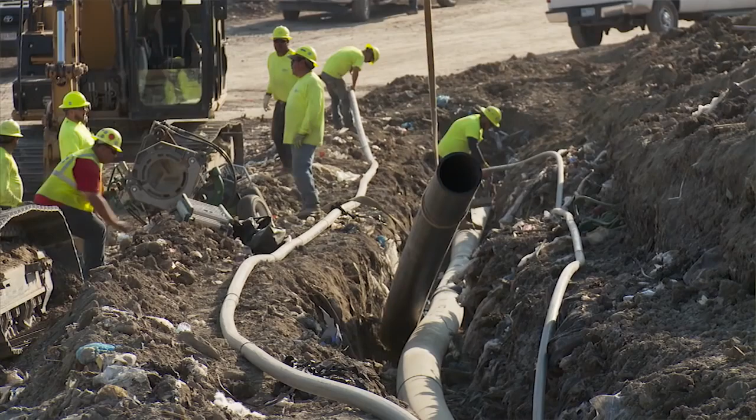Hello, my name is Roy McMasters. I have the privilege of introducing you to the Construction Division of American Environmental Group. We are an industry leader and pride ourselves on our commitment to the safety of our employees and the safety culture we have been able to create.

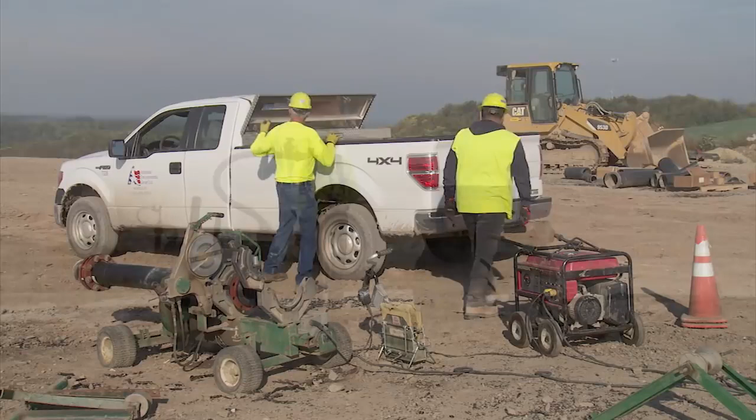Our number one priority has always been to strive for excellence. At AEG, we only do things the right way, which means working as safe as we possibly can every day. We want to make sure you are prepared when you are on the job, so we have created this safety video to give you the basic knowledge and assistance you may need to do your job properly and safely.

At AEG, you are part of a team, so remember your actions affect the entire team. For your safety and your team's safety, it is very important that you always comply with the safety rules. Please pay close attention to this video and make sure safety procedures become part of your everyday work routine. Do not hesitate to ask your supervisor any questions you may have after reviewing this safety video.

AEGL, professional excellence, dedication, and experience.

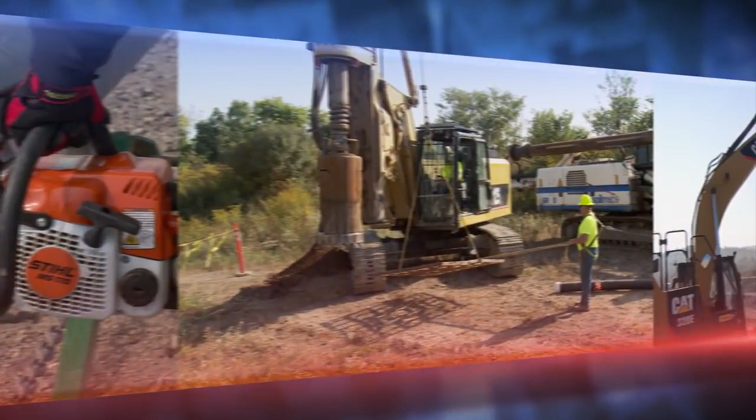Established in Richfield, Ohio in 2002, American Environmental Group Limited, or AEGL, is the leading solid waste construction industry in the United States. With approximately 500 employees and operations throughout the country, AEGL provides specialty environmental, construction, and maintenance services to solid and hazardous waste, environmental, energy, mining, and other industrial clients.

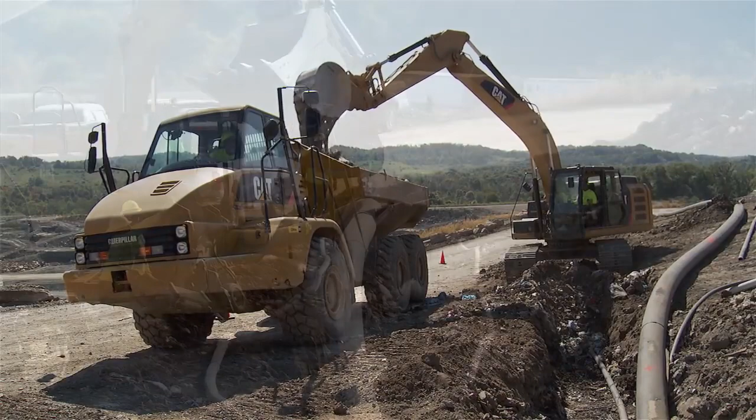We pride ourselves on safety, providing the highest quality service with an emphasis on meeting and exceeding the expectations of our clients. But the success of AEGL is dependent on the strength of its team. Each employee plays a vital role towards the company's success. Through a true open-door policy, employees can freely meet with any member of management to discuss concerns and questions regarding any aspect of a work situation. AEGL encourages strong and open communication within all phases of its operation.

Safety is a core value in all business operations of AEGL. It is our policy to operate worldwide in a safe and responsible manner, a manner which respects the health and safety of our employees, our customers, and the communities where we work. AEGL is required by law to follow many safety practices and regulations, such as those established by the Occupational Safety and Health Administration, commonly known as OSHA, and the Mine Safety and Health Administration, or MSHA.

More importantly, we recognize that our employees are our greatest asset, and we intend to do all that we can to protect our workers. As such, we have established safety rules, procedures, and practices to address recognized hazards and provide the safest work environment possible. However, the only way that any safety plan can be made successful is by adhering to it. Ignoring or deviating from company safety requirements puts everyone at extreme risk and therefore cannot be tolerated.

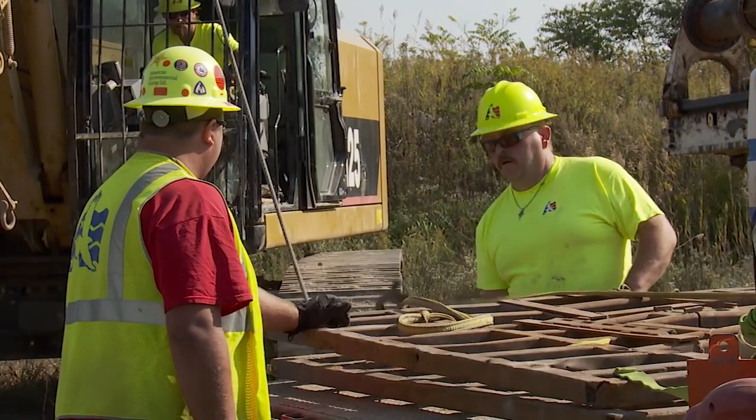supervisor. Every employee has the right and the obligation to personally stop or report any unsafe practice, work condition, or safety violation they observe. An unsafe work condition can also be caused by illness. Be vigilant in your watch for any ill effects experienced by crew members, especially those symptoms caused by heat stress or chemical exposure. Don't be afraid to approach or stop a coworker from doing something unsafe. You may actually be preventing an injury.

If the employee wishes to make a report, they may do so by speaking to their immediate supervisor or to a member of higher management. The employee may also submit his or her concerns in writing, either signed or anonymously.

HASPs are written documents that discuss the anticipated health and safety hazards at the project in which you are working. Their purpose is to define and communicate the company's health and safety plan that is designed to assure a safe working environment for its employees, guests, and the community at large.

The function of this Site-Specific Health and Safety Plan, or HASP, is to identify the health and safety hazards of each phase of site operation, identify the procedures to be implemented to ensure employee protection, identify the PPE requirements for the project, be available to any client or owner, contractor or subcontractor, or representatives who will be involved with site operations. It must also be accessible to employees, OSHA personnel, and federal, state, or local agencies with regulatory authority over the site. Clearly define all safety procedures.

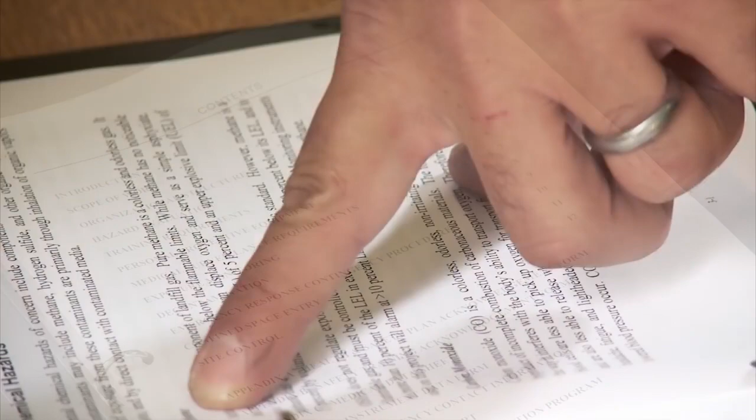In the event of conflicting safety procedures or requirements, AEGL personnel must implement those safety practices which afford the highest level of protection. Describe steps to be taken in the event of a site emergency, such as an injury or fire. While the HASP is prepared to address all of the known hazards at the site, often issues come up that were not anticipated. If you come across a health or safety issue during your work at a site that was not discussed in the HASP, bring it to the attention of your supervisor.

Material Safety Data Sheets, or MSDS, are documents that describe the chemical and physical hazards of chemicals at our projects. Examples of hazardous chemicals are lubricants for equipment, glues or adhesives for assembling pipes, and gasoline for fueling vehicles. MSDS documents are prepared by the chemical manufacturers and are usually shipped to AEGL with the products we buy.

The site supervisor must ensure that an MSDS is available at the project site for each hazardous chemical listed on the project chemical inventory. He must also make certain that the subcontractors are aware of the MSDS location and have access to this information while performing work on AEGL project sites.

While MSDS come in a wide variety of formats and lengths, they all will discuss, at minimum, the following important issues related to safety when using specific chemicals: the chemical name and ingredients of the product; physical and chemical characteristics, such as, is the product lighter or heavier than air, or is it flammable; the routes of entry into the body and how the chemical can affect you.

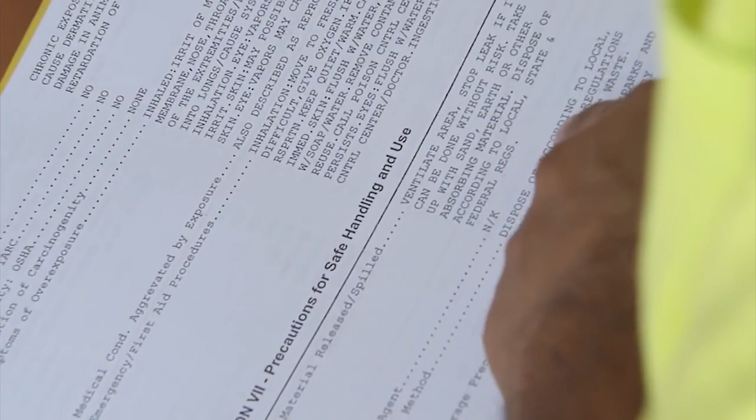It is very important to know the exact location of the MSDS book, so check with your supervisor if you are not sure. Always take the time to read the MSDS for the chemicals you use or are not familiar with. Know the hazards of the chemicals on site and the steps you can take to protect yourself and others before problems occur. The MSDS is a major component of AEGL's Hazard Communication Program.

Other parts include chemical inventory, proper container labeling, maintenance of the MSDS, and employee training. Most of these program subjects will be addressed on a project-specific basis. Site supervisors play a critical role in ensuring the dynamic elements of this program are implemented on each project site. The site supervisor must compile a written list of hazardous chemicals present on the project site to which employees may be exposed. This list must be kept current and in the project MSDS binder.

Site supervisors also are highly involved in container labeling. They must ensure that all chemicals present on a project site are contained in the original container and have readable manufacturer labels and warnings. The labels must be displayed on the container, kept clean and legible, and written in English.

In the future, changes will be occurring within hazard communication. OSHA is in the process of aligning OSHA's Hazard Communication Standard with the Globally Harmonized System of Classification and Labeling of Chemicals, or the GHS. The GHS is a system for standardizing and harmonizing the classification and labeling of chemicals. As of June 1st, 2015, all labels will be required to have pictograms, a signal word, hazard and precautionary statements, the product identifier, and supplier identification.

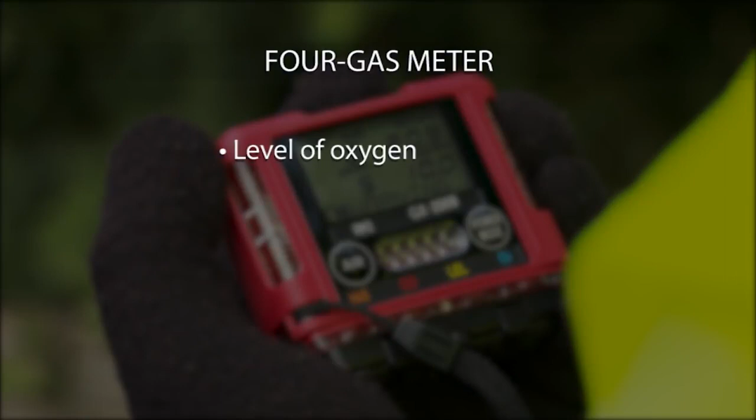Air monitoring instruments are also used at our projects as another means of protecting our workers. While it is not common, there is the potential for airborne chemicals or similar hazards to exist at some of our project sites, depending upon the tasks being performed and the specific area. The most common air monitor we use is a 4-gas meter. This instrument measures 4 different potential hazards in the air: the level of oxygen, the amount of flammables, the level of carbon monoxide, and the level of hydrogen sulfide.

Once the monitor is calibrated, it will alarm if any one of these hazards is present at an unacceptable level, and therefore warns you of the hazard before you work in the area. Air monitoring instruments are very important for your safety when used at our project sites. Be sure that you understand completely how the air monitor works and always follow the recommendations made from the monitoring results. It could very well save your life.

That means evacuate. For O2 or oxygen, the action level is required for a reading less than 19.5%. For the amount of gas or vapor in the air capable of producing a flash fire in the presence of an ignition source, better known as LEL, a percentage greater than 10% demands protective measures. For CO, or carbon monoxide, the action level is required for a percentage greater than 35 parts per million, or ppm. And for H2S, or hydrogen sulfide, a reading greater than 10 parts per million requires that action be taken. If you are unsure on how to operate or read the 4-gas meter, be sure to talk with your supervisor.

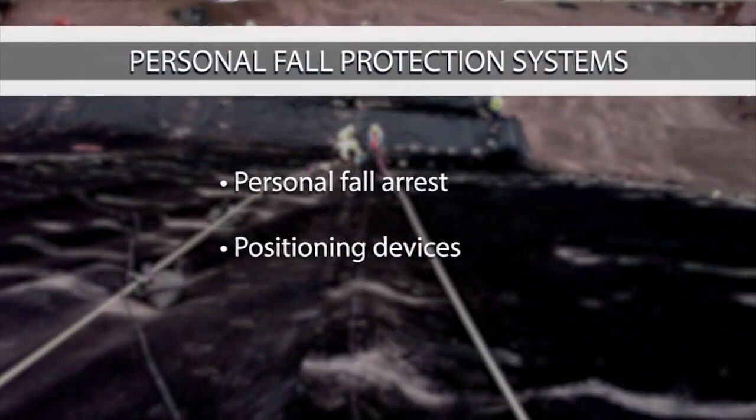Any employee whose work has them outside an area that is not protected by permanent or temporary guardrails or on any other surface, such as structural steel, steps, or landings, where they are subject to a fall greater than 6 feet, must be protected by a personal fall protection system. The 3 types of personal fall protection systems are personal fall arrest, positioning devices, and personal restraint systems. At times, AEGL performs work from elevated platforms where fall hazards exist. This work typically requires a personal fall arrest system for fall protection.

A personal fall arrest system is used to stop an employee's fall from an elevated working level. The system consists of an anchorage, connectors, full body harness, and a lanyard with a deceleration device. Self-retracting lifelines or a vertical lifeline with a rope grab can be used in lieu of the 6-foot lanyard with a deceleration device. Anchor points used in a personal fall arrest system should be secured at or above the level of the back D-ring on the harness. This action will ensure that the free fall distance is limited. The anchor point must be a structural member capable of supporting a minimum weight of 5,000 pounds per employee. The supervisor must ensure that all personnel using a personal fall arrest system are properly trained.

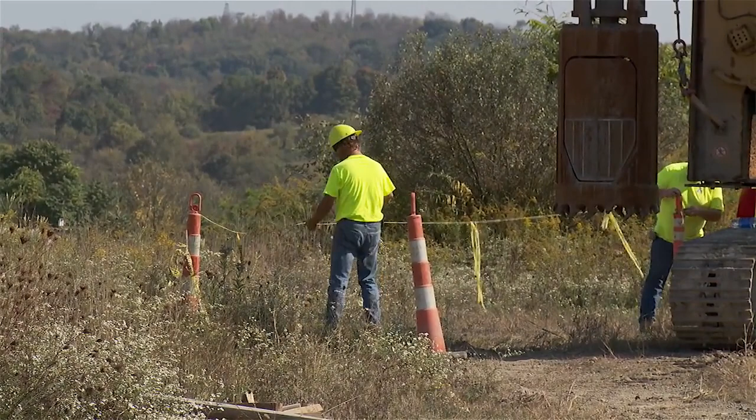For all AEGL drilling operations, there are special fall protection guidelines that have been set in place. To begin, these requirements specify that a 20 to 25 foot barrier must be set up around the borehole before any drilling starts. This barrier can be made up of caution tape or fencing when available. Before any drilling activity begins, you are required to be in a fall protection harness. And this harness must have the safety line connected to an anchor before you are allowed to cross the barrier. In addition, the safety line must be set to allow you no closer than within 2 feet of the borehole. If you are new to drilling operations or have any questions, your supervisor will walk you through the procedure when you are on site.

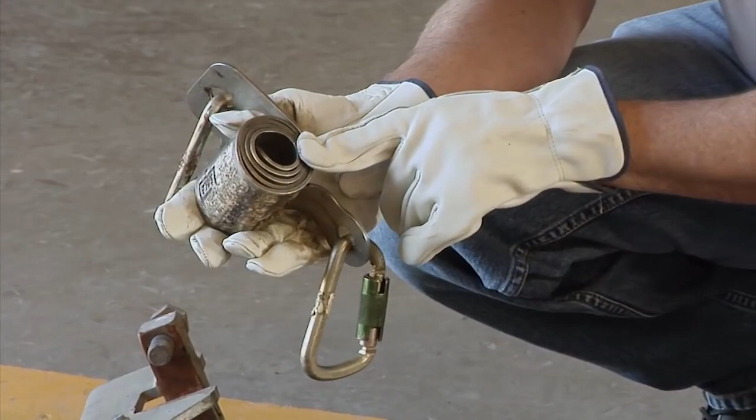It is essential to the safety of everyone that every piece of fall protection equipment be inspected and maintained on a regular basis. Each personal fall protection system's component must be inspected prior to use. Check for wear, tears, mold, mildew, or distortion. Ensure that no straps are cut, torn, or scraped. Check for worn stitching. Inspect hardware for cracks, sharp edges, or burrs. Ensure that snap hooks close and lock tightly. Check for distorted hooks or faulty hook springs, and that all buckles work properly.

Defective equipment must be identified, tagged out, and replaced. Equipment that has been subject to impact loading must be disposed of and not used again. All employees who might be exposed to fall hazards must be trained. The training must enable each employee to recognize the hazards of falling and the practices to be used to minimize these hazards.

There are many things you can do on your own to make your workday safer. By dressing and behaving in a safe, responsible manner on a daily basis, safety will become a habit. While using proper PPE can greatly reduce your chances of being injured, your general dress plays a big part as well. Never dress in worn, torn, or compromised clothing. Make sure that your clothes are of a comfortable fit, not too loose or too tight.

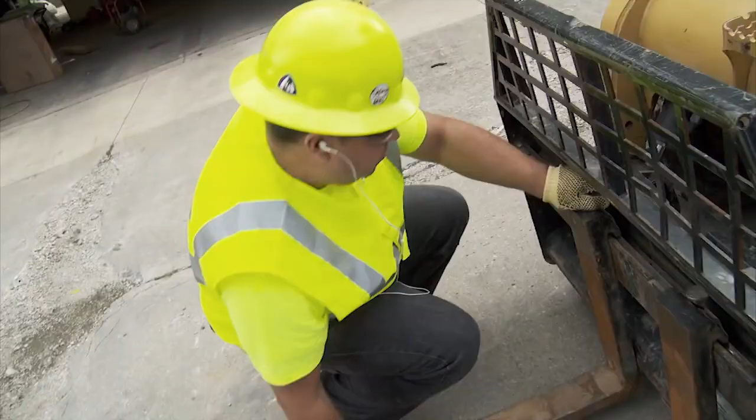Shirts must have sleeves that extend at least 4 inches down the arm. Keep pockets fastened when using equipment where debris or sparks may come in contact. Never wear any type of jewelry while working. Your conduct and behavior are also vital to the crew's safety. Never engage in activity that can cause unnecessary distractions to others. Horseplay of any kind will not be tolerated and is grounds for dismissal.

Personal behaviors and activities must also be kept in check as well. Using headphones to listen to music or broadcasts at the worksite is not allowed. The use of personal cell phones while working is also prohibited. Again, making good safety practices part of your everyday routine will get you in the habit of being safe, and it gets others thinking about their safety preparation as well.

A site-specific orientation is an OSHA requirement and must be conducted by the site superintendent prior to your initial entering of the job site. The site safety orientation must also be documented and signed by all employees attending. In most cases, the client, owner, or contractor will require all AEGL employees working on site to attend a separate site safety orientation. The briefing is usually conducted by the site safety officer.

During the initial AEGL pre-job site-specific training session, employees will be instructed on the following topics: content and implementation of the HASP, site hazards and controls, intended use of the personal protective equipment, and emergency information, including local emergency response team phone numbers, route to the nearest hospital, evacuation, and emergency response procedures. A dry run to the hospital would be good practice in case of a medical emergency.

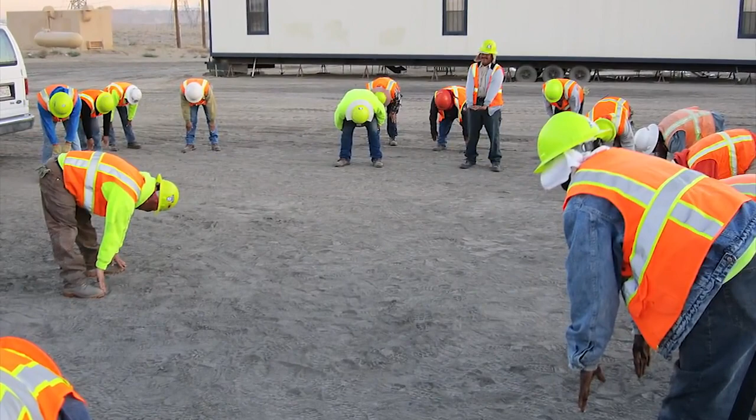Toolbox meetings are used most successfully to inform employees of worksite hazards, assist with safe procedure reviews, and help develop employee awareness. Hazard awareness is a major factor in injury prevention. Often, exercise with stretching is conducted to get muscles and mind warmed up for the work ahead. The following are the primary steps of the JSA safety meetings.

On the front page, or Step 1, your foreman or supervisor will identify all the items that pertain to your work activities that day. These items will be reviewed with the crew. On the back page, or Step 2, all the work activities planned for that day will be listed under Sequence of Job Steps. These are short descriptions of what types of work you will be performing. Examples would be fusing 18-inch pipe, trenching, and placing HDPE pipe.

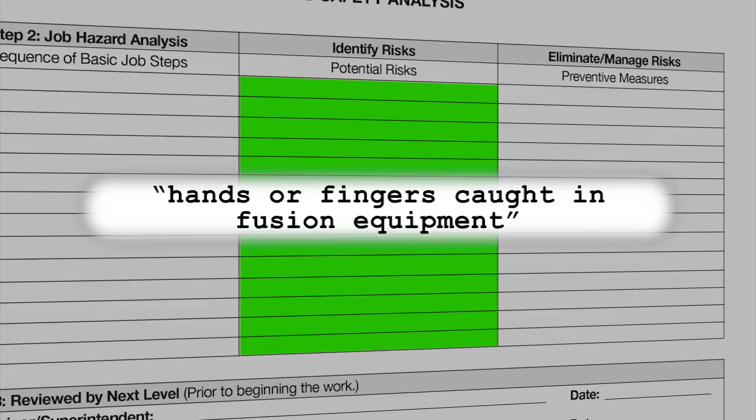Next, the amount of risk involved is identified in each task that is listed in the Potential Risk section. Examples of risk include, but are not limited to, tripping over extension cords, or hands or fingers caught in the fusion equipment. For trenching and placing HDPE pipe, risk includes high H2S, carbon monoxide or methane, trench collapse, and falls into trench. The last step is reviewing and enacting preventive measures to eliminate the risk of injury or reduce it.

For example, preventive measures for tripping over extension cords include: keep extension cords out from around your feet. For hands or fingers getting caught in fusing equipment, the preventive measures would be: wear work gloves. Do not put your hands in pinch points on the equipment. Communicate clearly. Pay attention and ensure pipe is secured and will not roll.

Examples of preventive measures for high H2S, CO, or methane would include: ensure gas meters are calibrated and working correctly. Gas meter required when entering the trench. And if gas meter alarms, leave the trench. For trench collapse and falling into trench, the measures would include: ensure that ladders are placed within 25 feet of all personnel in the trench. Ensure proper benching and sloping. Ensure that spoil piles are 2 feet from the edge of the trench, and place barricade around trench.

Once all the hazards have been identified and preventive measures have been set, the final step is to follow the safety procedures talked about and then sign the form. Take these meetings seriously by listening, asking questions, contributing your know-how for the less experienced coworkers, and following the advice discussed in the meeting.

Many physical hazards can be present during the use of hand and power tools. The greatest amount of injuries associated with hand tools arise from improper maintenance, misuse, and lack of proper PPE. The 3 essential elements of hand tool safety are tool selection, safe work practices, and maintenance. The following safe work practices must be used when using hand and power tools.

Retractable razor knife. Use proper PPE, such as Kevlar gloves and eye protection at all times when using a retractable razor knife. Always use the proper cutting technique, which is to be cutting away from your body parts whenever possible. Be aware of your surroundings. Don't cut over or around a finished liner, as you may damage the liner. Never carry your retractable knife in your pocket. Use a pouch or case to prevent punctures to your body parts.

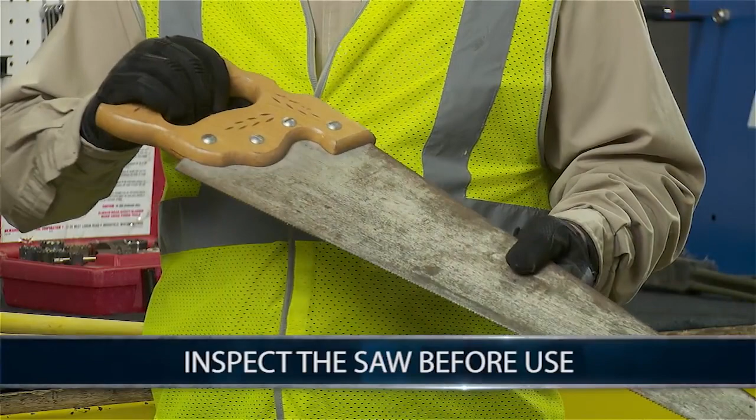The following checklist should be followed for safe use of hand saws. Inspect the saw before use and ensure that the handle and blade are undamaged. Always wear gloves to grip the saw better and protect your hands. Safety glasses must always be worn to protect your eyes, and only use the saw as directed.

All power or hand tools must be inspected before every use. Look over the plug and cord and check to see that the plug and prongs are intact and that the cord is not damaged. Make sure that your powered hand tool is plugged into a GFCI to protect you from electrical shock. As always, wear your eye and hand protection.

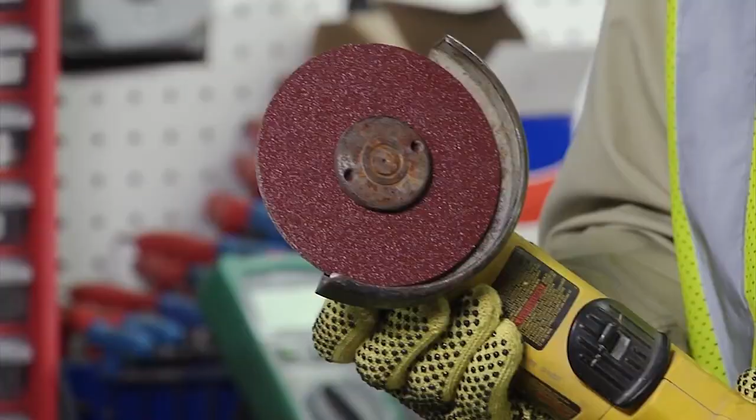Handheld grinders. Always use proper eye protection, such as safety glasses and a face shield. Make sure that the clothes you are wearing fit properly and are not too loose. Excessively loose clothing could get caught in the rotating disc of the grinder. Never wear jewelry of any kind. Check the power cord and plug for damage. Make sure that the grinding disc is in proper condition, mounted properly, and tightened down.

Always use the grinder with its guard on. Never remove or alter the guard in any way. Always use hearing protection. To prevent accidental startup, employees should be continually aware of not holding the start button while carrying a tool that is plugged in. Establish a buffer zone from coworkers.

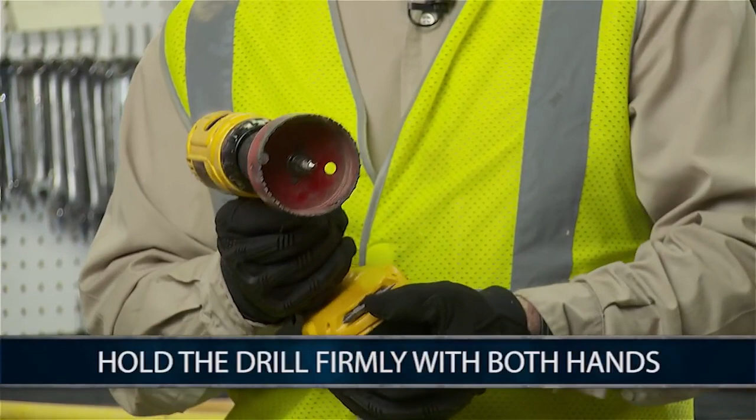When operating the drill, hold it firmly with both hands to prevent the drill from spinning or rotating. Always be certain to inspect the drill bits and attachments as well for excessive wear and tear. Bits that are worn or damaged not only may be hazardous, but they will make your job much more difficult.

When drilling out the hole for a branch saddle, special precautions must be taken to prevent you from being struck by the drill. When drilling, there is always the risk of the drill bit becoming pinched or wedged in the material. If you are not prepared for this hazard, the drill could spin and end up striking you. Follow these precautions to avoid this hazard.

Always use 2 hands to hold the drill. Never have your face or any body part close enough to the drill that it could strike you. Be prepared for the possibility of the drill to catch and spin at all times. And, as with all your tools, when you're done with it, be sure to put it away in its proper location.

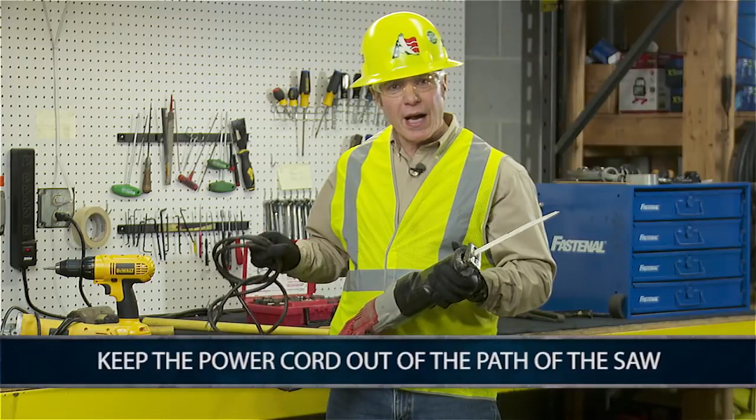For many project situations, a Sawzall is the right tool for the job. The following are safety guidelines that must be recognized when using this particular saw. Wear eye protection at all times when using the reciprocating saw. Keep the electrical cord out of the way of the cut being made. Hold the saw firmly with both hands when making cuts.

The saw will vibrate a lot during operation and must be held tightly to keep the cut on line and to avoid being dropped during operation. Never operate when in close proximity to other workers. The blade on this saw is unguarded, and the vibration movement of the saw makes it especially hazardous to bystanders.

Always be certain that the material being cut with the reciprocating saw is properly secured. And do not bind or pinch the blade when making cuts with the reciprocating saw. Binding the blade may cause the blade to break or possibly jerk the saw from the user's hands. Be sure to use the correct type of blade for the material you're cutting. If you're unsure which type of blade to use, ask your supervisor.

Remember, the Sawzall is a very useful and effective tool, but the unprotected blade also makes it very dangerous. Always keep safety and situational awareness in mind at all times when using the Sawzall.

Chainsaws are used almost daily on AEG construction job sites. They are extremely useful, but can also be very dangerous if not used properly. Remember, the chainsaw will cut through your leg just as fast as it will cut through HDPE pipe. To prevent you from being injured, the following safe work practices need to be followed each and every time that you use a chainsaw. If you have never operated a chainsaw, ask your foreman or supervisor to show you how to operate a chainsaw correctly.

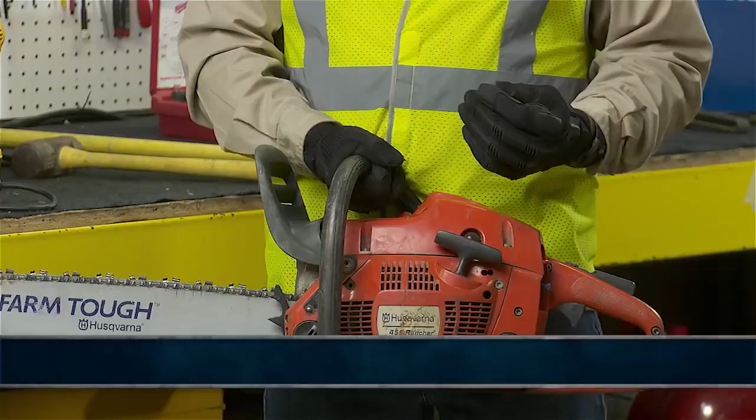Proper PPE is always required. This includes safety glasses or a full face shield and hand protection such as Kevlar gloves. Remember to always inspect the chainsaw before each use. Ensure that the saw is fueled and that the blade is sharp and set at the correct tightness. To properly tighten a chainsaw blade, speak to your foreman or supervisor, even if you think that you know how. This is because different manufacturers require different tightening techniques.

Now let's take a look at how to properly start a chainsaw. Knowing how to start a chainsaw properly is extremely important to your safety. In fact, most accidents involving chainsaws are due to poor technique at startup. Remember, you must always take your time when working with a chainsaw, making certain that no harm will come to you or your coworkers. While we all want to get the job at hand done, never cut corners when it comes to safety. Let's begin by inspecting the chainsaw blade.

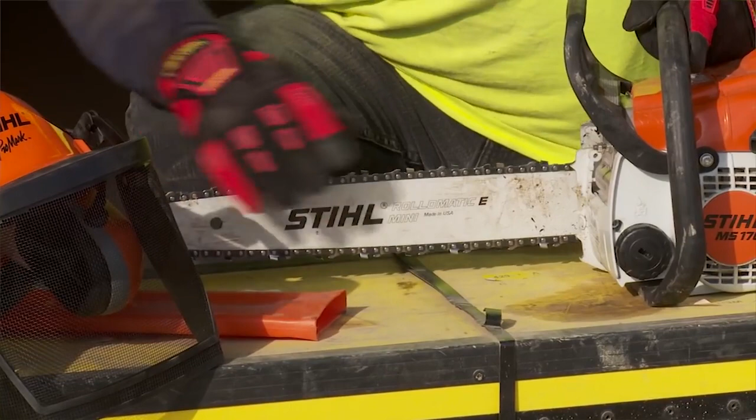To identify if your chainsaw blade needs tightening, look for a slack in the chain that hangs below the handlebar. Once properly tightened, a chainsaw blade should allow minimal slack and snap back into place on the bar when you pull it down. Remember, we do not normally use bar oil in our chainsaws. This is because the oil would interfere with the welding of the HDPE pipe.

Before you start the chainsaw, always clear your immediate work area. Then, make sure that the fuel and oil caps are tight. Wipe away any fuel or oil that may have been spilled when added. This is also a good time to perform a visual inspection to check to see if any parts are broken or missing. Also, you should always look to start a chainsaw at a minimum distance of 10 feet away from any fuel source or container.

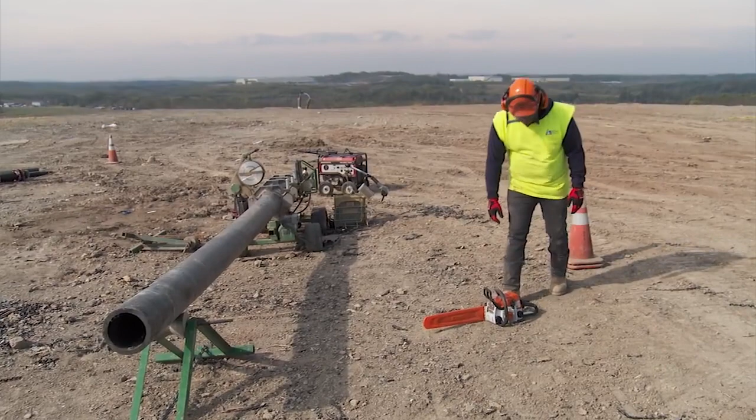As mentioned earlier, a chainsaw is never to be operated without wearing the proper PPE, such as eye and hand protection. To start a chainsaw, begin by placing the saw on the ground. Make sure the chainsaw is on level ground and check that there are no objects or obstructions nearby that could come in contact with the saw. Then, slip the toe end of your right foot under the rear handle.

Next, take your left hand and wrap your hand around the top handle and grasp it firmly, making sure that your elbow is in a locked position. With your right hand, grip the starter handle and pull on the rope. If the saw doesn't start within 5 tries, alert your supervisor for help.

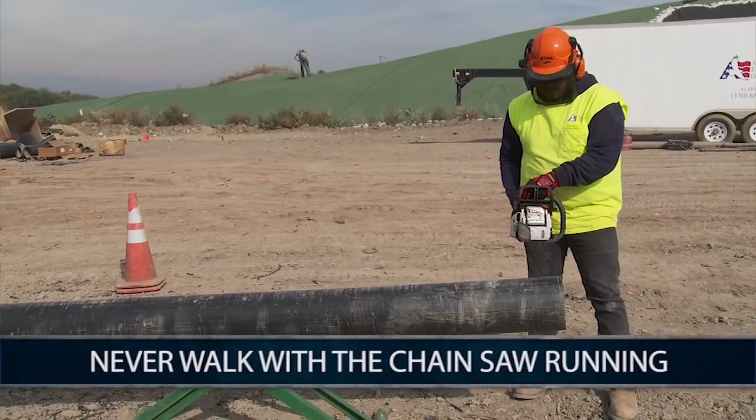After starting the chainsaw, release the chain brake. Maintain a firm grip on the machine at all times. Keep the chainsaw in front of you and never walk with the chainsaw running. If you need to adjust what you're cutting, always apply the chain brake and set the chainsaw down first.

Always make sure that you follow these steps entirely and completely when starting a chainsaw. The few minutes that it takes to operate a chainsaw or any piece of equipment properly is nothing compared to the time it takes to recover from an injury. Remember, when working with any power tool, being smart means being safe.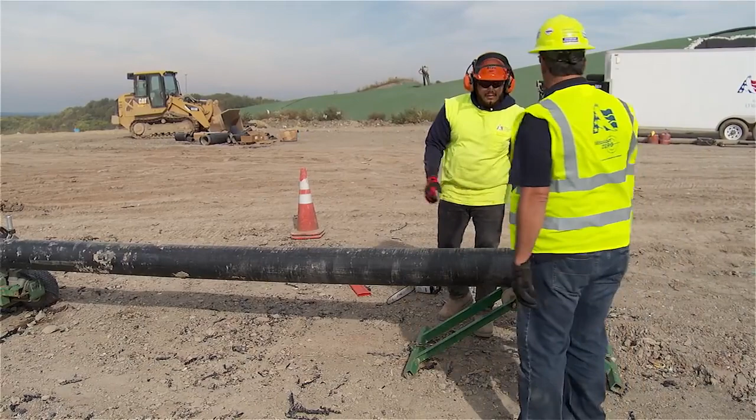When cutting high-density polyethylene pipe, better known as HDPE pipe, these certain precautions always need to be taken. The pipe must be secured so that it does not roll or pinch. Position and support the pipe so that the pipe does not pinch the blade while you are cutting through it. If the pipe pinches the blade, do not force the blade out of the pipe. Reposition or support the pipe so that the cut opens up.

Always stand uphill of the pipe in case it rolls. Never forget that if you are approached by anyone while the chainsaw is running, engage the chain brake and shut off the engine.

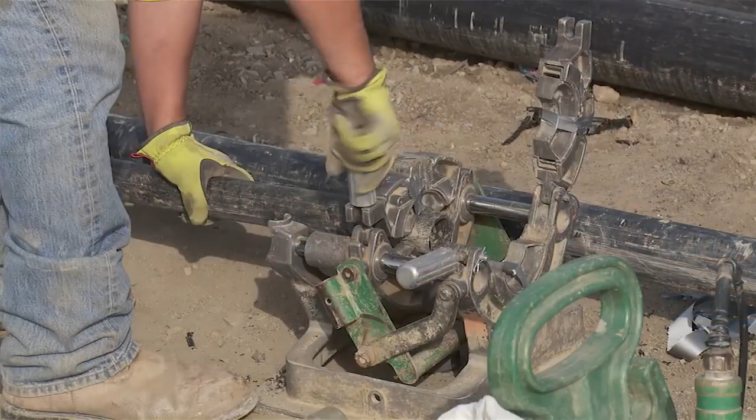Fusing equipment is used at all AEGL construction sites. Their purpose is to bond pieces of pipe together. This can be done as a linear bonding or for the combining of intersecting sections, such as a T-connection. Fusing equipment operates by holding the HDPE pipe in place with clamps. While the pipe is held in place, a facer plate shaves the ends of the pipe until they are even.

Next, the heat plate is set between the pipes to melt the plastic. After a determined set time, the heat plate is removed and the two ends are brought together. Pressure is applied to the pipes until they cool. You must be aware that there are hazards when using this type of equipment. This includes pinch points and burns.

Therefore, PPE is required while operating this equipment. The PPE includes, but is not limited to, safety glasses, gloves, and steel-toe boots. The pinch points include the clamps that hold the pipe itself, and the hydraulic pistons.

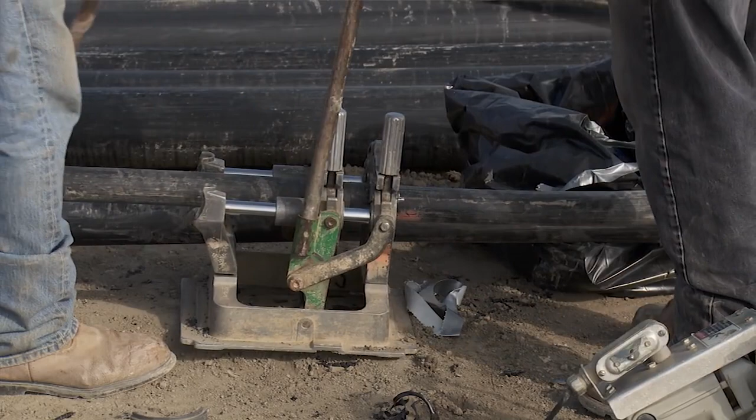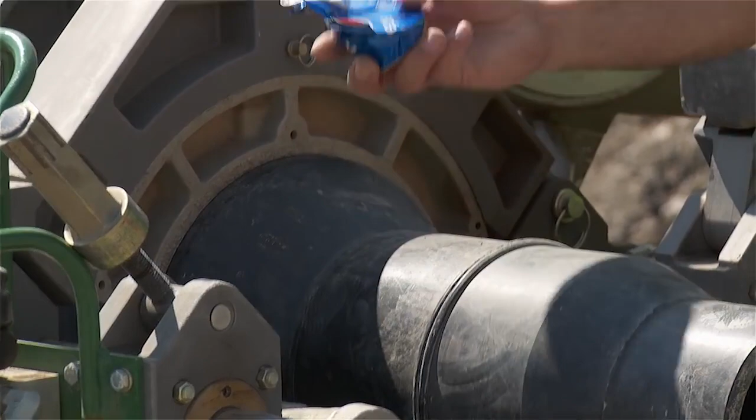You should also never touch a heat plate while it is on. Always pick it up by the handle and keep it away from others. And be sure to place it in its protective holder when it is not in the machine. Additional precautions should also be taken while loading and unloading pipe into the fusion machines. This is because clamps can fall into place, striking your hands. You must always be aware of where you have your hands placed.

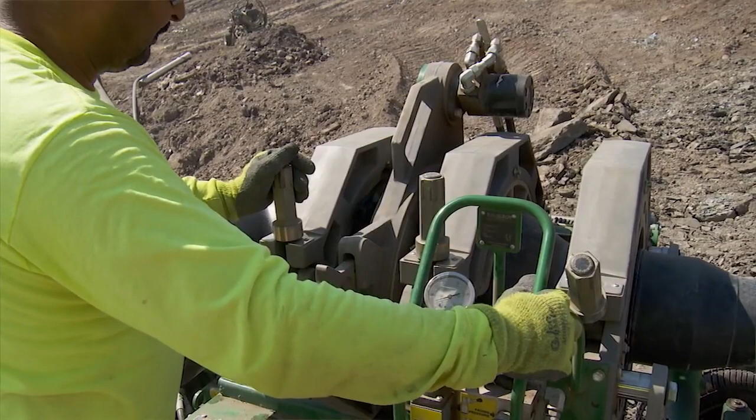Another potential hazard is the action of the pipe rolling out of the clamps and striking you. To prevent this, ensure that the pipe is secured properly in the clamps. Always be prepared to move just in case the pipe does come out of the machine. There are other hazards present that could also cause injury to your hands. Be sure to keep your hands clear of the machine when operating the hydraulic controls. When the machine's hydraulic controls are working, numerous pinch points exist that could severely damage your hands.

At times, we may need to take the machine apart to work in tight areas. Breaking down a fusion machine presents special hazards. These hazards include pinch points, cuts, and abrasion hazards, and the potential of heavy equipment parts dropping on your feet. You should always be on the lookout for these dangers and put yourself in a position that minimizes risk. Always wear a good construction-designed glove and keep your hands away from pinch points.

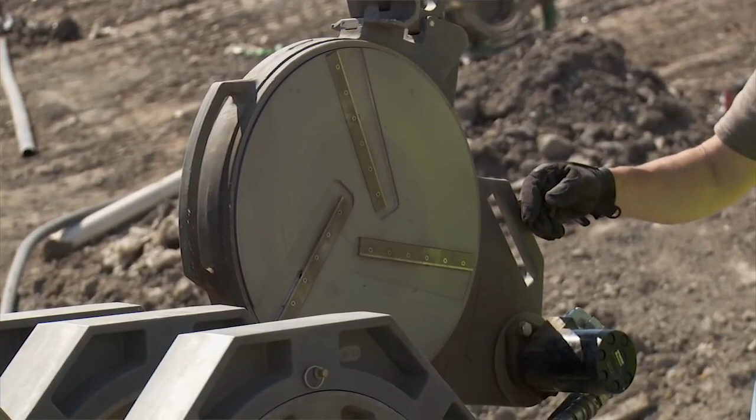The machine should always be turned off while breaking it down, and any hydraulic pressure should be drained off. The facer plates have very sharp blades and should only be carried by the handle. Be sure to watch where your feet are when moving the equipment. These parts are heavy and could cause serious damage if dropped on your foot.

While there are unique hazards present when moving equipment into a trench, the actual work presents situations that could put your safety in jeopardy. Special precautions must be taken when fusing pipe in a trench. Air monitoring is required to ensure the atmosphere in the trench is not explosive and that the air is safe to breathe. High methane concentration, which can be found in trenches, could cause a fire. Always have a fire extinguisher nearby.

And be sure to watch where your hands are at all times when working in a trench, especially when attaching the fusion machine to the pipe. A tight area to work in makes the chances of you putting your hands in the wrong place much greater. Always take the time to be aware of your surroundings and your body positioning.

The use of a fire extinguisher in the hands of a trained adult can be a life and property-saving tool. However, improper use can compound the problem, increasing risk of injury. Utilizing a fire extinguisher requires training on its proper use and maintenance.

Fire extinguishers are divided into 4 categories based on the different types of fires that typically occur. All AEGL fire extinguishers should have an ABC rating on them and be inspected monthly. Employees can expect to find fire extinguishers in company trucks, company mobile equipment, work and office trailers, fuel containment areas, around portable generators, and near any flammable hazards.

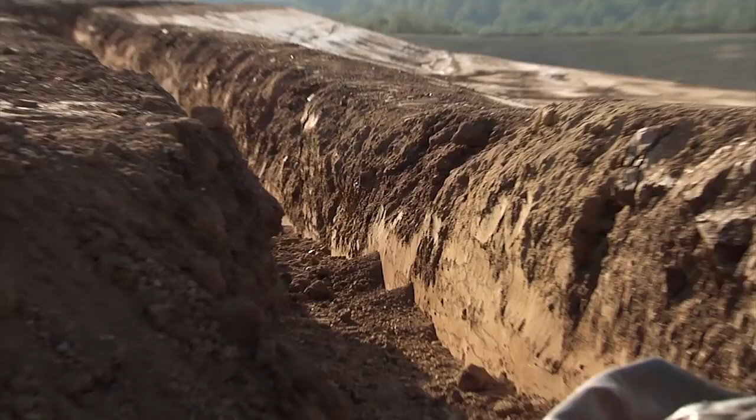Physical hazards include those that can cause exterior injuries, such as cuts and burns, and those that can cause interior damage, such as hearing loss, heat stress, and other illnesses. Due to the nature of our work, physical hazards exist at every AEGL job site and include the potential for being struck by heavy equipment, spreader bar, or GCL bars, caught in collapsed anchor trenches, exposure to excessive noise from

operating equipment, and heat or cold stress from working outside, electrocution due to contact with overhead power lines, slips, trips, and falls from walking on uneven ground or liner, cuts and abrasions from razor knives, hand tools, and other sharp equipment, and exposure to adverse weather conditions, such as high winds, lightning, snow, and ice storms.

Remember, the key to avoiding these hazards is preparation. This means always being aware of your surroundings and acting in the safest manner possible.

Some of the most common accidents at our projects are slips, trips, and falls. While these types of accidents don't appear significant, they account for approximately 20% of all disabling on-the-job injuries. Fortunately, they are easy to prevent if you stay alert.

Always have an awareness of where you're walking, especially around mud, wet landfill liners, and other slippery surfaces. Avoid going near or having to walk through slippery surfaces if possible. Wear the proper shoes. Wear shoes that have a deep tread and provide good traction and are appropriate for the work environment. When walking on slippery surfaces, shorten your steps as you would on ice.

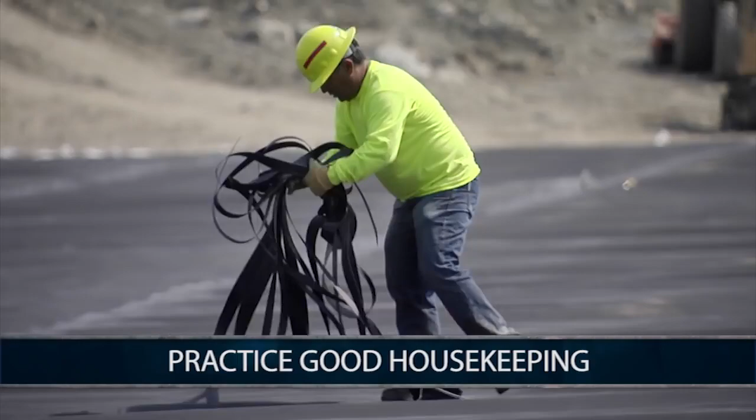Beware of slip hazards like mud and wet surfaces, especially when stepping up onto heavy equipment. Watch for trip hazards. This includes power cords, pipes, tools, and uneven surfaces or terrain within the work area. Good housekeeping will help minimize these potential hazards. Keep your work area free of any waste materials.

Other hazards found in a neglected work site are unattended electrical cords and pieces of liner cuttings. These situations are a safety problem waiting to happen. Don't let anyone have a slip, trip, or fall because of not cleaning up after yourself. The best practice is to pick up as you work. Keep your work trailer clean and free of clutter, especially the main walkways.

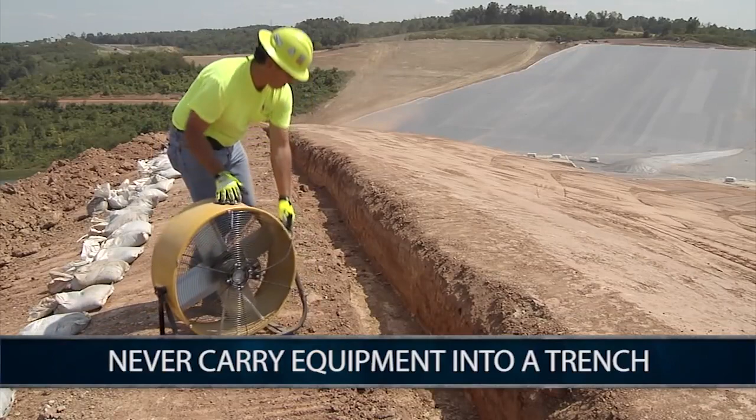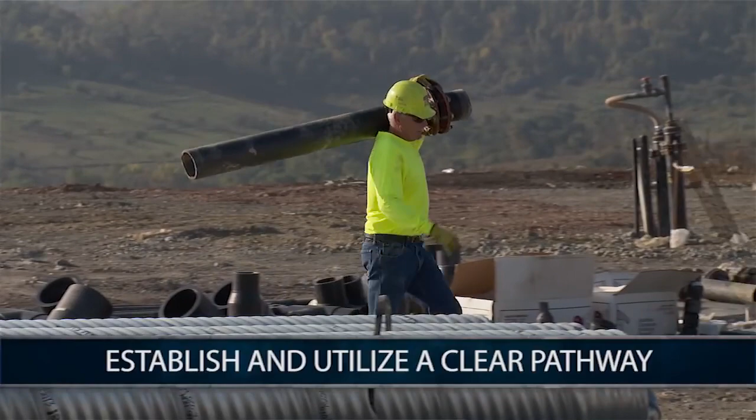Never carry equipment into a trench. Set the equipment down first, enter the trench, and then retrieve the equipment. Communicate hazards to on-site personnel. Establish and utilize a pathway which is most free of slip and trip hazards.

Establish a walkway over the anchor trenches to prevent the workers from falling in or jumping the trench. And be alert and correct or report potential tripping hazards promptly. Slips, trips, hits, and falls don't have to occur if you follow these safety rules. Take the time to watch where you are going and avoid these hazards.

Lifting anything can pose a hazard to your back. Just how serious the risk is depends on your personal strengths and weaknesses, the weight of the load, the shape or awkwardness of the load, and other factors. Before you lift anything, be sure it's not too heavy for you. If it is, get help or use a mechanical lifting device.

Next, survey your intended route for hazards. Now you're ready to lift. When lifting objects, use the following proper lifting technique. Know the path of where the load is being moved. Move any hazards from the path. Stand close to the load. Center your body on firm footing. Keep your feet shoulder-width apart to get the best footing possible.

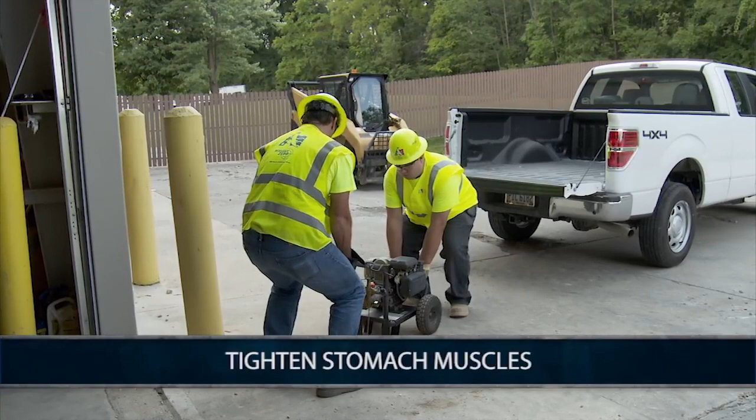Bend at the knees, not at the waist. Keep both feet flat and knees flexed slightly. Tighten stomach muscles to offset the force of the load. Grasp the object at opposite corners. Lift with your legs instead of your back muscles. Keep your back upright and avoid twisting.

Remember that pushing a load typically puts less stress on your back than pulling it. And most importantly, think before lifting. If the object is too heavy, get help.

Driving a company vehicle may be the most dangerous activity any AEGL worker can perform. Across the United States, more workers die from accidents while driving company vehicles than die from falls, electrocutions, and all other occupational sources combined. AEGL recognizes this serious work hazard and wants you to be the safest driver you can be, both on and off the job.

To operate any AEGL vehicle, you must have a valid driver's license, and you are only permitted to operate vehicles for which you have the proper class identified on your license. You will then receive on-the-job instruction on the vehicle you will be operating. Be sure you understand how to perform an outside inspection of the vehicle, parking procedures, and other rules. Finally, you must adhere to defensive driving principles for all vehicle operations.

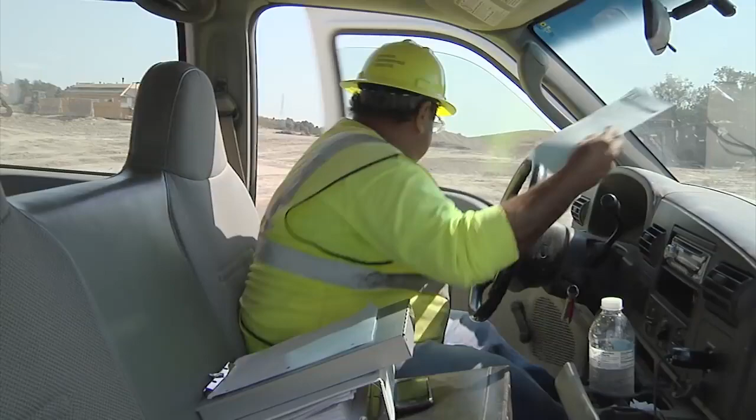Once inside the cab, take a look at the fuel gauge to be sure that you have enough gas for the job. Also, be sure to fill the tank if it's less than half full before returning the vehicle. Don't put your coworker in a bad situation by returning a vehicle with no fuel. Make sure you keep the cab and interior of the vehicle clean and organized. Remember that you are part of a team, and we all need to do our part. Don't leave a mess for someone else to clean.

Seatbelts must be worn at all times by all passengers. There is probably no other safety device ever invented that has saved as many lives as the automobile seatbelt. Use it. Obey all posted speed limit and traffic signs, particularly when on a project site. These signs provide information to help protect you and must be followed at all times. Always use the parking brake when stopping for extended periods, parking, or exiting the vehicle.

If you are a passenger, never ride outside the cab or passenger area of a vehicle, such as on the tailgate or in the truck bed. For one, you can't wear a seatbelt in these areas. And two, if the vehicle has to make a sudden stop, you may be tossed off the vehicle and seriously injured. If you are the driver, never allow anyone to ride in anything other than a seat equipped with a seat belt.

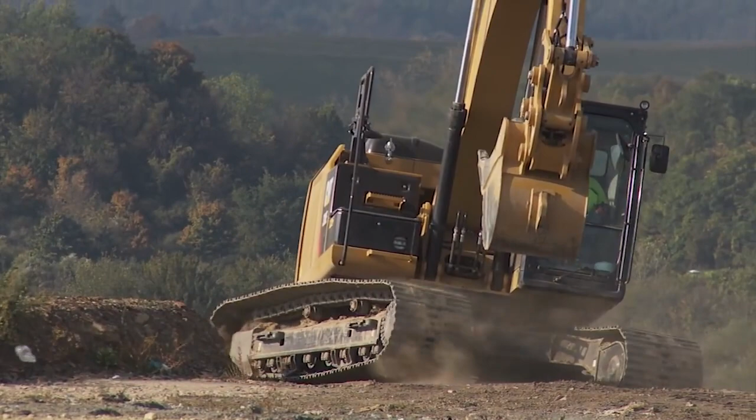There is to be no cell phone use of any type, even with a hands-free device. This includes talking and making calls. And absolutely no texting can occur while driving a company vehicle. While it is imperative that we follow all safety guidelines when operating a vehicle, it is just as important that we understand the importance of safety outside of the vehicle. As part of the job site workforce, we must always be aware of our surroundings, and that includes movement of heavy equipment and construction traffic.

Never approach a moving vehicle unless contact has been made and proper signaling has been exchanged. Always maintain a safe distance, a minimum of 30 feet from any vehicle or piece of equipment that is in motion. And be aware of the potential for the vehicle or equipment to move.

This is especially true in situations of high noise levels or when ear protection is used. In these instances, you now have only your sight to rely on for any impending dangers. Therefore, always position yourself while working so that you can see the potential pathways of construction equipment. Remember, whether you're in the cab or outside of the cab, your responsibility to safety is equally important.

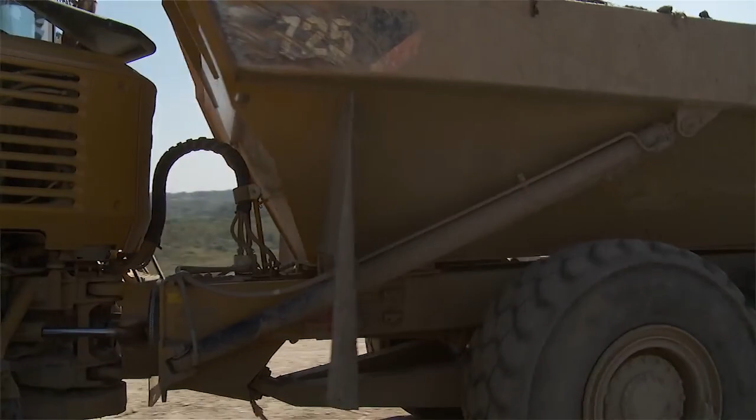When working alongside a road, AEG employees need to be particularly mindful of the dangers. Construction equipment and vehicles that we work around have limited fields of view. Therefore, we must make ourselves as visible as possible when working alongside the road.

One way to accomplish this is by erecting high-vis barricades or cones along the roadside to warn drivers that workers are in the area. Another method to control traffic is to use personnel wearing high-vis clothing with signs. Remember, we should always communicate with the site supervisor to ensure that all operators know where the crews will be working. This is especially critical in traffic-related circumstances.

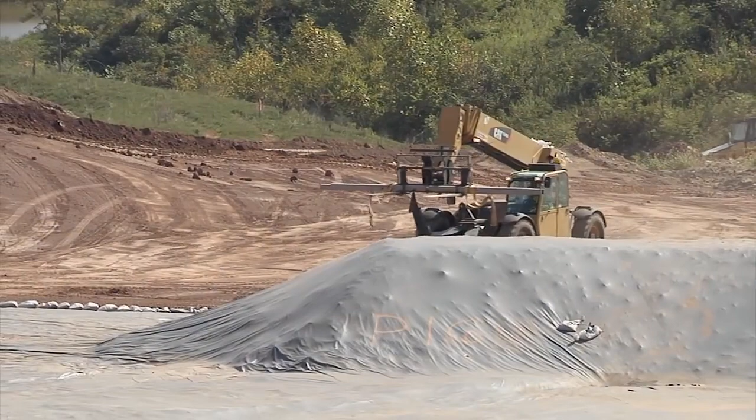When projects require the need to move heavy material or access areas that we couldn't otherwise reach, AEG uses forklifts and man lifts. Both pieces of equipment, however, can be very dangerous and even deadly if not operated properly. Never operate a forklift or man lift without the proper authorized training, which involves classroom learning and a hands-on demonstration where you are to show your ability to safely operate the equipment.

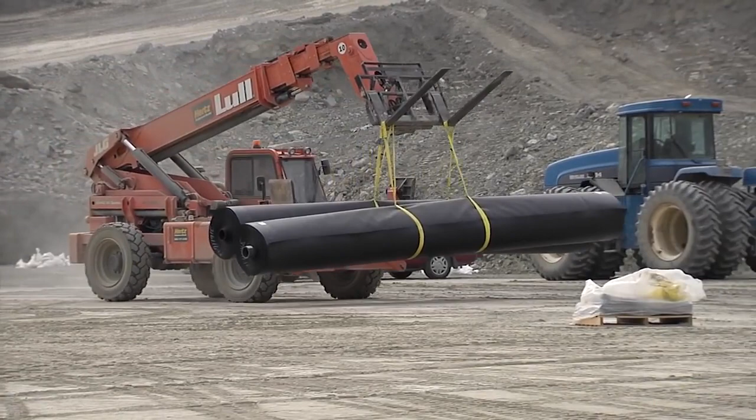Let's talk about some of the hazards associated with each piece of equipment. Forklifts, sometimes referred to as powered industrial trucks, are mobile, powered trucks used to carry, push, pull, lift, or stack material. Remember, they are not an automobile and cannot be operated by just anyone. You must be properly trained on the forklift before using it.

Forklifts and aerial lifts may only be operated by employees who have received certified training on fork and aerial lifts. All training certificates must be on the operator at all times. All equipment operators are responsible for the safe operation of heavy equipment under their control. Operators are responsible for inspecting their equipment to ensure safe performance. Mandatory, documented pre-shift inspection must be done by the equipment operator on each piece of equipment he operates.

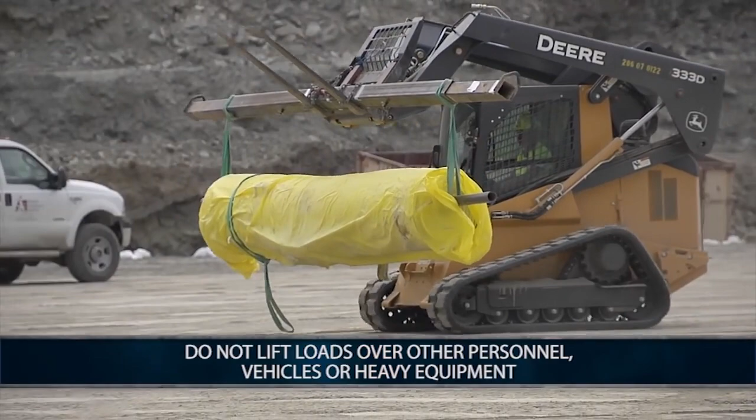All heavy equipment on the job site is required to have a working backup alarm. If it is not working, do not operate the equipment. All equipment operators are required to wear seat belts during operation. Do not lift loads over other personnel, vehicles, or other heavy equipment. Always use a spotter in limited areas and when backing up.

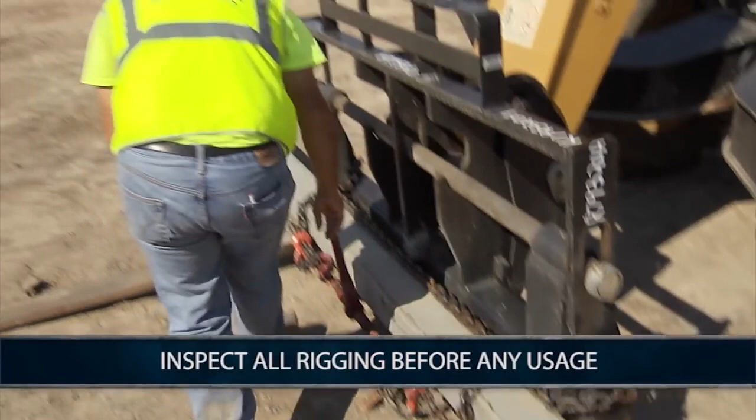Remove your hands from the controls when people approach your equipment. The act of accidentally hitting or moving a control has injured and even killed workers. Inspect all rigging, such as shackles, bridles, slings, straps, and chains for wear, bending, or weakness before any usage. Always know the chart capacity of what your equipment can lift. Make sure you have a lift plan in place before lifting any load.

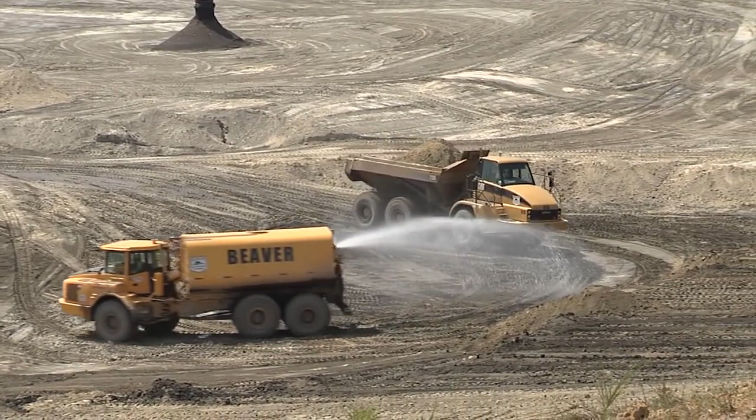Equipment should never be operated closer than 10 feet from power lines. For higher voltage power lines, a larger clearance is required. Operators must comply with the state-specific requirements where the job site is located. For example, in Arizona, water truck operators need to go to a dust control compliance training, and all contractors need to purchase a dust control permit yearly.

Man lifts are used to lift people to work in elevated areas. As with forklifts, they have specific requirements and hazards. Man lifts, like forklifts, cannot be operated without proper documented training.

Working around heavy equipment can be dangerous because of the power and size of the equipment, the limited field of vision, and the noise levels that can be produced by the equipment. Heavy equipment at a worksite may include a variety of forklifts, wheel loaders, bobcats, water trucks, aerial lifts, and track excavators. To ensure the safety of all personnel in the work areas, the following safety procedures regarding heavy equipment must be reviewed prior to and followed during work activities.

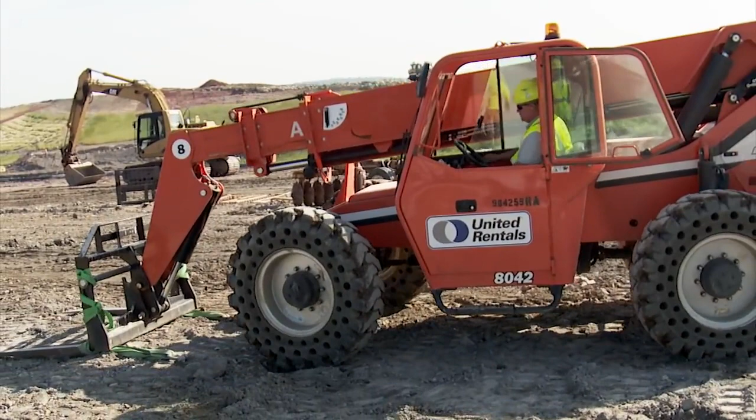No riding on vehicles or equipment on anything other than fixed seats will take place. This includes the truck beds, buckets, or forks on heavy equipment. Ensure that the equipment operators are trained or experienced in the operation of the site-specific equipment.

Personnel should never approach a piece of heavy equipment or enter the exclusion zone without the operator's acknowledgement, meaning, at minimum, making eye contact with the operator or the stoppage of work or yielding to the employee. The exclusion zone is a vicinity of approximately 30 feet around the piece of equipment in use. Always maintain visual contact with the operator when in close proximity to the heavy equipment.

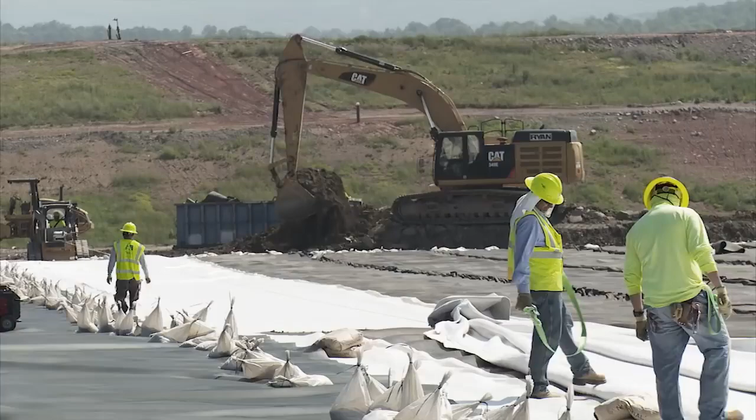Never walk under a load of a bucket, spreader bar, or forks. Never walk between the fork boom and main cab of the power industrial forklift, or stand beside an open truck bed. Do not touch any of the straps or chains used for the rigging of the spreader bar once it is under load. Never approach equipment from the rear, and never walk behind heavy equipment. Wear hearing protection while on or around heavy equipment when normal conversation cannot be heard above work operations.

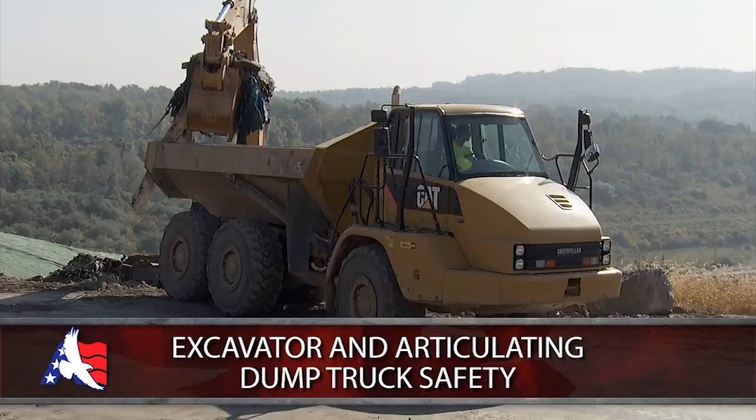As the operator of heavy equipment, you must perform a walk-around inspection before using the equipment. To ensure your safety, it is required that the review and comments be documented on the heavy equipment inspection checklist. The checklist will include the following items. Check that all your mirrors are in place and clean. Ensure that your backup alarm is working. These points are extremely important. You are under no circumstances allowed to operate the machine without a working backup alarm and mirrors.

Always wear your seat belt. The parking brake must be applied before you exit the machine, and never leave the cab of the machine while it is parked on a slope. All workers need to assess their location when working around heavy equipment. In other words, you need to have situational awareness. Do not place yourself between the machine and anything that you could be pinned against. This could be another piece of equipment, materials, or even a mound of dirt. Keep eye contact with the operator and have a plan in mind to maneuver out of the way in case something goes wrong. Never, ever walk behind the machine while it is operating.

Very often, AEG uses excavators to lift objects. Whenever we are lifting objects, you never want to use your hands to hold on to the object. Always use a tagline. This is a rope that is 6 feet long or more and is attached to the item being lifted. The tagline helps you to maneuver the object from a safe distance. When lifting an object with the excavator, we never want to attach straps or lines to the teeth of the bucket. The acceptable practice is to attach a clevis and lifting hook to the eyelet on the bucket. It should go without saying that you should not, under any circumstances, walk under a suspended load.

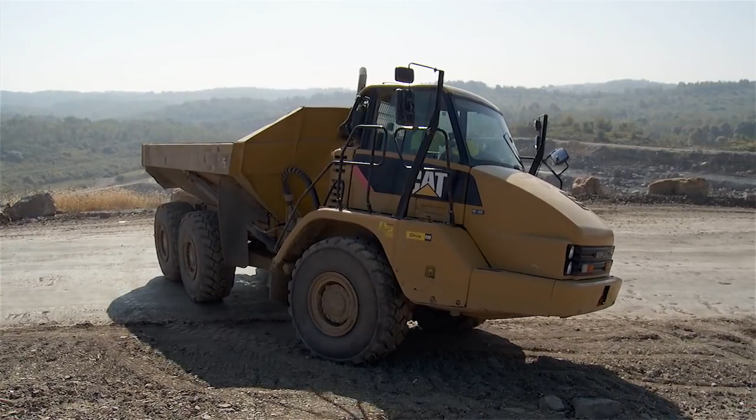When working around articulating dump trucks, there are rules put in place to keep you safe. Approach the machine from the front so that you can make direct eye contact with the driver. Never stand next to the dump body when the machine is being loaded. Rocks and dirt could potentially fall out of the dump body and hit you. When a loaded dump truck is moving towards you, back away as much as you need to give the machine a wide berth. Rocks and dirt have been known to fall out of the machine and hit workers that are standing or working nearby. And never walk behind a dump truck.

One form of communication that is extremely important to know and understand is hand signals. Hand signals are used for communicating to other workers, such as between an equipment operator and a signal man, sometimes called a ground man. Before we get into the specific hand signals that are used, there are some ground rules that you must know regarding hand signals and working around operating equipment. One signal man. There should only be one signaler for each piece of equipment or equipment operator. More than one signal man can lead to confusion and potentially a serious accident.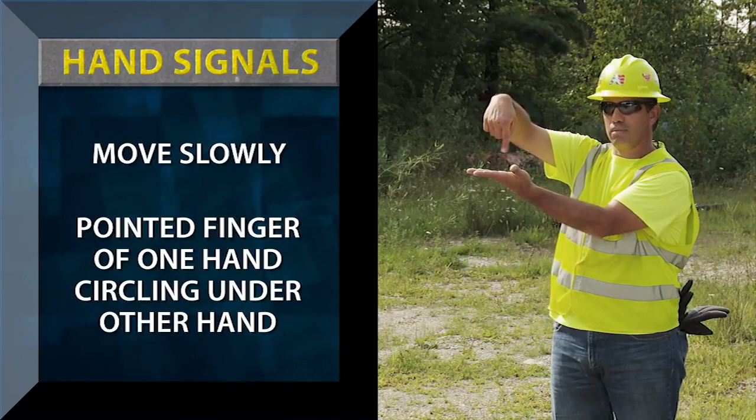It is important for you to recognize our hand signals so you will be able to know what the signalman is indicating. You will not be asked to be a signal person until you have been properly trained. Here are some of the common hand signals we use on our projects. Raise the boom, thumb pointing up. Lower the boom, thumb pointing down. Move slowly, pointed finger of one hand circling under other hand. Lower load, finger pointing down and circling.

Hoist load, finger pointing up and circling. Stop, one arm extended and circling. Emergency stop, both arms extended and circling.

Trenching, or excavating into soil, is a task we perform often. Digging a trench, or excavating correctly, requires experience and training. As a new employee to AEG, you need to understand the hazards associated with trenching and excavations and the precautions that both you and your crew need to implement to work safely.

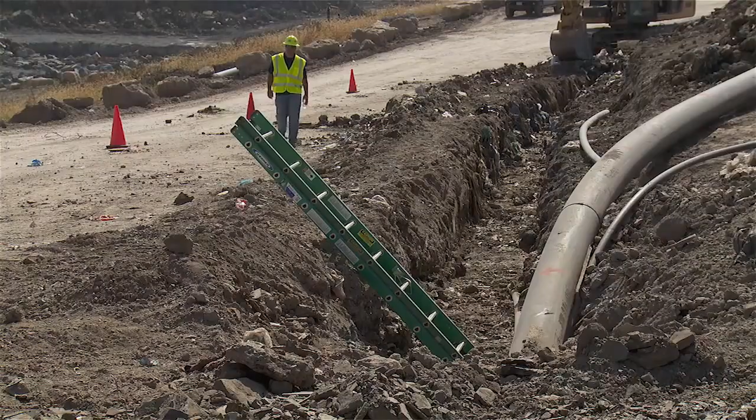The two main hazards associated with working in a trench are cave-ins and hazardous atmospheres. Cave-ins can be prevented with proper benching and sloping of the soil. If needed, more sophisticated protection can be used, like trench boxes and shoring. A properly benched trench will look something like a stairway or stadium bleachers. Sloped trenches will have a more gradual slope to the sides.

At times on AEG job sites, some trenches will not be sloped or have benching. This is done with trenches that no one will enter. The pipe will be laid in the trench without anyone needing to be in the trench.

The second primary hazard is unsafe atmospheres in a trench. When you enter a trench, always make certain that you or one of your co-workers in the trench is wearing their 4-gas meter. Ensure that the 4-gas meter is operating correctly and has been calibrated correctly. This is your best protection from exposing yourself to flammable or toxic environments.

Another important thing to remember is that you must always have a ladder in place within 25 feet of where you are working in a trench. Your supervisor will review these rules and precautions on site whenever trenching is performed.

No employee will be permitted to work on any part of an electrical power circuit unless the person is protected against electric shock. This must be done by de-energizing the circuit and grounding it, or by determining that the circuit has been locked and tagged out.

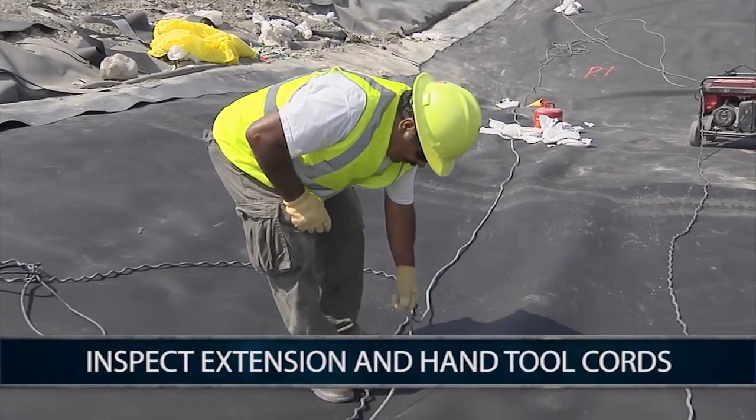Electrical and extension cords are a very useful tool on any job site. However, when not used safely, they have the potential to cause serious injury. The following guidelines must be followed to make the use of extension cords as safe as possible. Inspect extension cords and hand tool cords for signs of wear every time you use them. If the outer insulation has a hole or cut in it, do not use it.

Remember, never use damaged extension cords and always replace them with an undamaged cord. When you discover a damaged extension cord, you must attach a tag to the cord stating "out of service." This way, no other employee will use the cord and get hurt. Keep cords away from water and hot objects like the muffler of a generator. Avoid placing electrical cords across traffic areas.

Ground fault circuit interrupters, or GFCIs, are required on all extension cords and equipment. GFCIs are usually found built into the generator. If a GFCI is not present on the generator, an external GFCI must be used. Always use heavy-duty 3-prong extension cords for tools with 3-prong plugs. Never remove or bend back the 3rd prong.

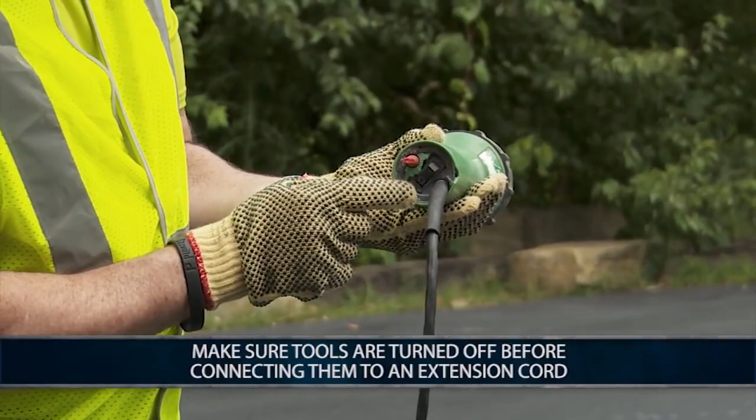Make sure your tools are turned off before connecting them to an extension cord. When disconnecting the cord, pull the plug rather than the cord itself. Unplug and put away extension cords that are not being used. Cords are removed from service if the outer insulation has been damaged to the point that the interior wires are visible. To remove a cord from service, attach a tag that states, "Out of service, do not use."

At many job sites, generators are the only source of power that we may have to operate our tools. This may require them to run during the entire workday. Because of this, the generators may need to be refueled many times over through the course of a day. While we may be anxious to keep the workflow moving, we can't lose sight of the fact that refueling a generator must be done deliberately and cautiously.

Remember, we're working with gasoline, which is a highly flammable and combustible liquid. Rushing to refuel may result in serious injury. Always follow the guidelines when working with generators and fuel. Never fill a generator while it is running. Turn the generator off and allow it to cool for 5 minutes. As it cools, take the time to inspect the generator for any damage, leaks, or spills.

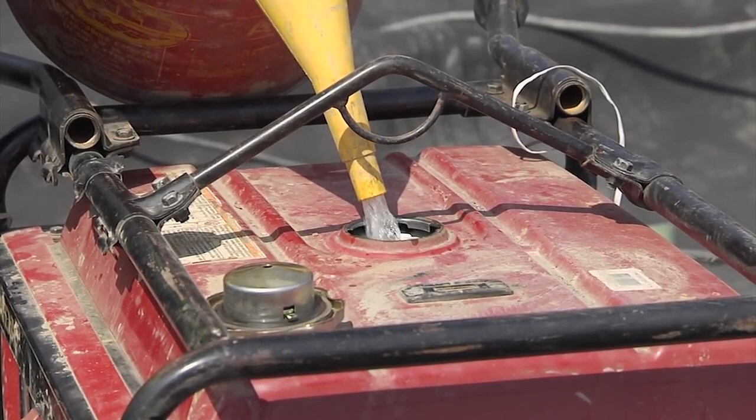Be sure that you are wearing the proper PPE, such as eye protection and gloves. Take your time when adding fuel. Be careful not to spill any fuel on the ground or on the generator itself. If the fuel is spilled, clean the generator or area properly. If the ground is saturated with fuel, the generator should be moved from the area before restarting. Never fill a generator on the liner. Should any spills occur, the fuel can damage the liner.

Have the proper fire extinguisher on hand, meaning within 25 feet, in the event that a spark ignites a fire when restarting. Alert any coworkers that may be in the area to keep a safe distance from the generator upon restart.

Another essential component to the generator is the GFCI, or Ground Fault Circuit Interrupter. All generators on construction sites must have GFCIs on the 110 outlets. Most generators manufactured today have these built in. However, generators that don't have this feature require that an external GFCI be used. An external GFCI plugs into the generator, and then the power tool is plugged into the GFCI.

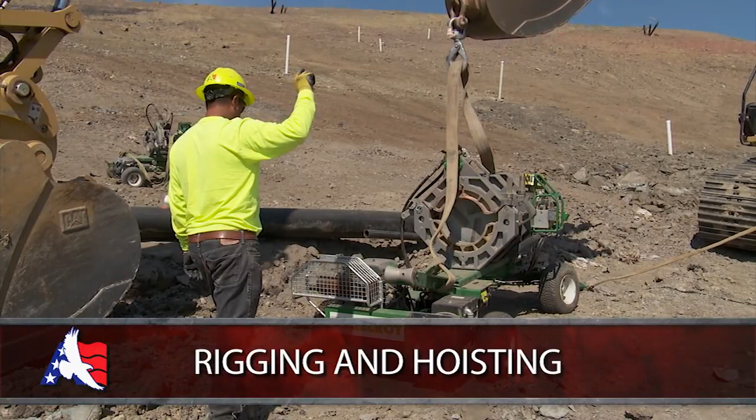Lifting rolls of liner, lifting pipe, lifting generators, and other portable heavy tools are all activities that require rigging. At most AEGL job sites, rigging and lifting is an everyday occurrence. The term rigging refers to anything that is used to move heavy objects, such as straps, cables, and other related equipment. And with the moving of heavy objects comes the risk for injury.

To maintain the highest level of safety whenever heavy lifting is required, precautions are necessary to prevent harm to personnel, equipment, materials, or the environment. Only properly trained and authorized AEGL employees are allowed to use rigging equipment to unload and move materials. Operators must ensure lifting equipment is properly inspected, tested, utilized, and maintained. Working loads on rigging must not exceed the safe limits established by the manufacturer.

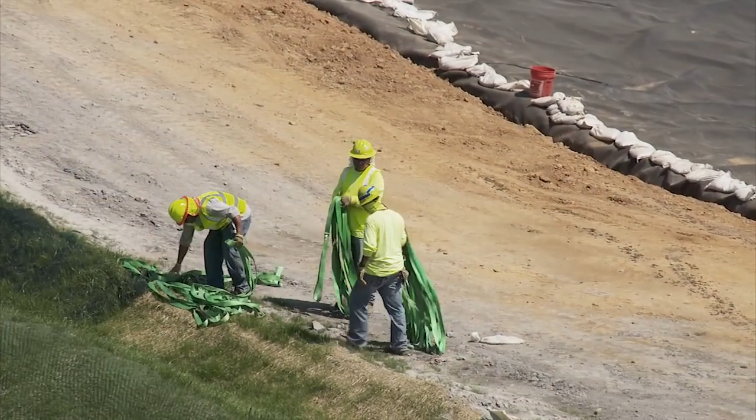All field operations must maintain and adhere to a well-planned program of inspections to be certain that all equipment being used is within the required tolerance. An initial inspection must be performed at the time the equipment arrives on the project site. New synthetic slings, chokers, wire rope slings or bridles, and chains for use on the project do not require a proof test, but they must be tagged. The tag must contain information on the size, length, and rated vertical capacity of the slings or chains. All manufacturer shackles and hooks must have visible size and tonnage stamped on them.

Employees using rigging equipment are responsible for inspecting their equipment prior to and during use. Only competent persons should perform the inspections. A competent person is defined by OSHA as one who is capable of identifying existing and predictable hazards in the surroundings or working conditions which are unsanitary, hazardous, or dangerous to employees, and who has authorization to take prompt corrective measures to eliminate them. The inspections must be documented on the proper inspection sheets that are available in the AEGL Health and Safety Plan under Rigging and Hoisting.

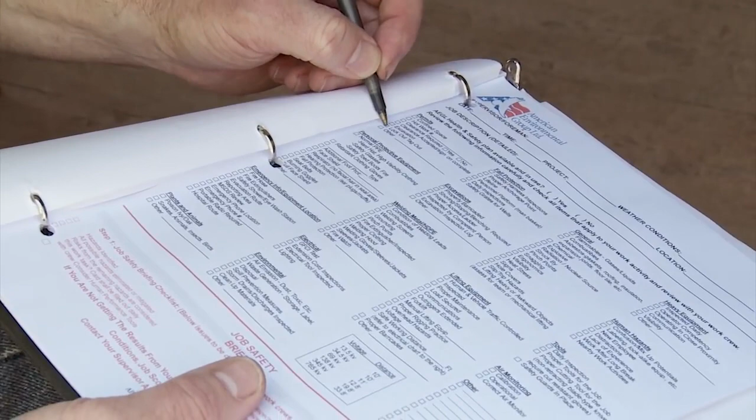All records must be kept in the folder or binder in case of an audit by the company safety director or OSHA. The following items are to be checked during inspection. Please refer to your rigging and hoisting plan for hazards to look for on each item and proper storage. Any equipment found to be defective is to be immediately tagged out, removed from service, and destroyed. Wire rope slings, chain slings, synthetic slings, end fittings, shackles, hooks.

While inspections may seem like a tedious chore, it is an essential part of our safety plan. Taking just a few minutes to be certain that your gear is in proper working order can save you and your coworkers from serious injury.

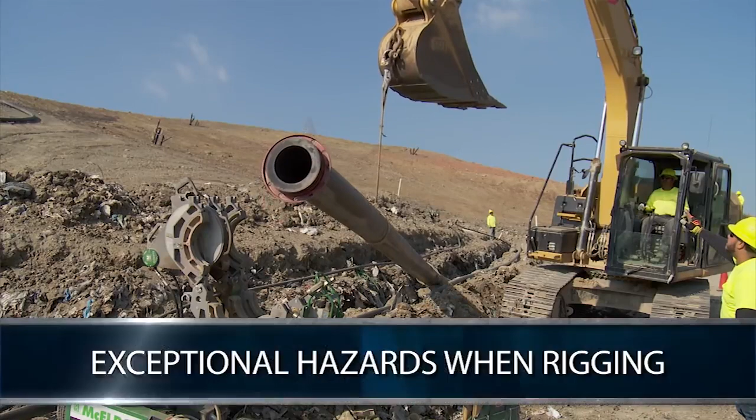Due to the unique work that is performed by AEGL and the size and weight of the materials that are used, there is the potential for certain hazards that are considered exceptional to rigging situations. However, while these hazards are rare, it is important to understand them and always be aware of them. This is extremely important, not only when working with rigging, but when working around rigging as well.

Situational awareness and recognizing the potential for danger are two of the main components of a personal safety program. Understand that there is risk involved with each work activity and that you should always be keeping a close eye on what's going on around you. The simple act of being aware and alert to possible dangers can mean the difference between life and death.

In many circumstances, the environment itself can put you and your crew at risk. These hazards can come in different forms, each one having its own element of danger. Some environmentally related threats can affect you directly, such as wind and lightning. Others can take on a more subtle approach, such as exposure to extreme temperatures. Any of these circumstances could not only put you at risk for injury, but can jeopardize your health as well. Therefore, it is imperative that you recognize and understand the potential for danger while in the environment, both directly and indirectly.

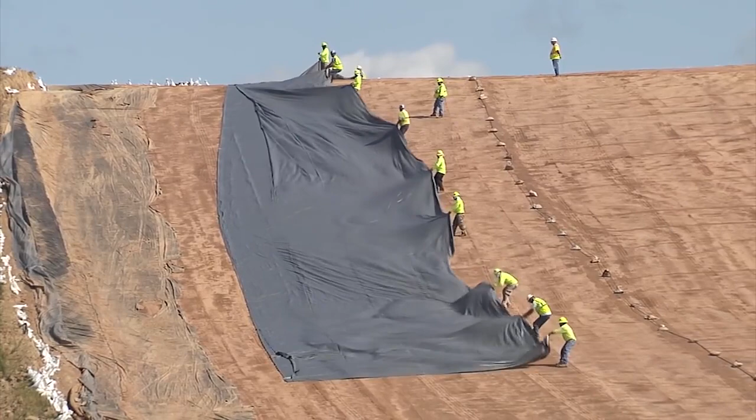When working with large, flexible materials, such as a liner, wind can become especially dangerous. The liner can react just like a sail on a boat by capturing the force of the wind. As you can imagine, this could have devastating results. Depending on the strength of the wind, the liner can be actually ripped from your hands. It is imperative that you understand the proper way to react in windy conditions.

Be aware of the situation. Notice how the wind is traveling and work from an angle that has the least resistance. Visualize how the wind will affect the work at hand. Drop the liner when necessary. If you feel the liner being picked up by the wind, don't fight it, just let go. The force is too great to manage. Many injuries have been sustained by trying to maneuver the liner in windy conditions.

Lower the boom, literally. When working with deployment equipment, lower the boom if wind gusts begin to lift the liner. Stay upwind from the liner. Think about it. You don't want to be in the direction of the liner should the wind begin to carry it. Keep wind direction in mind when positioning yourself.

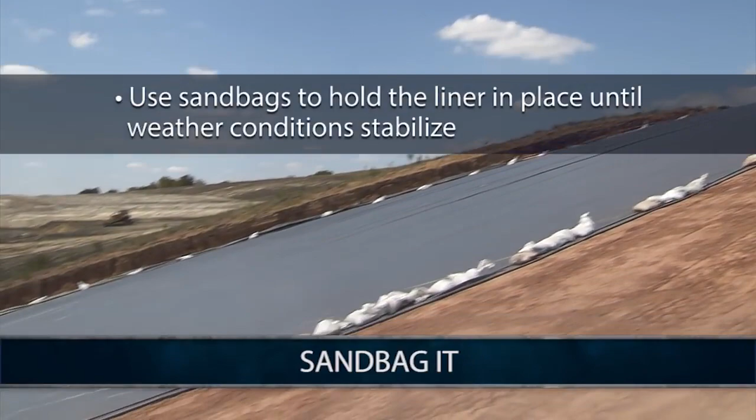Sandbag it. Use sandbags to hold the liner in place until weather conditions stabilize. And always know your next move. Anticipate what will happen if the wind catches the liner. Then decide what the safest course of action would be.

Rain, dew, or any form of wetness can cause many job site hazards. Limited vision, slippery conditions, and risk of electrical shock are just a few of the challenges that dampness creates. When working in inclement weather, sound judgment must be used to stay safe. Recognize the signs. Be aware of bad weather indicators, such as quick changes in humidity, dark clouds, and gusty winds. Thunder is a sure sign that trouble is brewing. The earlier that you can take precautions, the better.

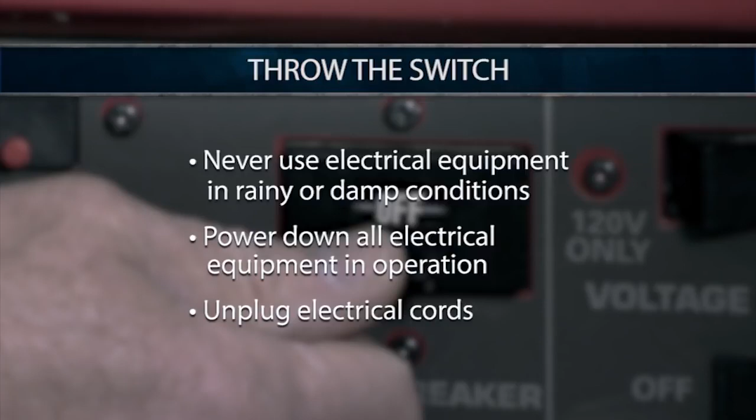Throw the switch. Never use electrical equipment of any kind in rainy or damp conditions. Power down any and all electrical equipment that is in operation. Any electrical cords should be unplugged and gathered. Remember, a frayed cord in use during wet conditions could result in electrocution. Any cord that appears to be damaged should be removed from the work area and marked for inspection.

Keep your footing. The potential for slips and falls is extremely high in wet or rain conditions when working around liners. Take slow and deliberate steps and avoid walking on any sloped terrain. Maintaining sure footing in a rain situation is another reason to only wear work boots that have the proper amount of tread.

Lightning strikes. If lightning is observed or heard in the area, the work must stop immediately and the crew must regroup under shelter. Designated safe areas will be determined and identified in the tailgate meeting. If you have any questions about where to report in the event of an electrical storm, ask your supervisor. Or even better, voice your concerns during the tailgate meeting. Someone may have the same question, and speaking up may keep someone else from injury.